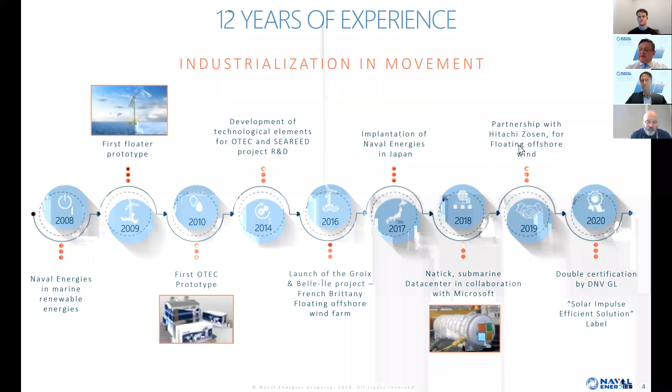But let's concentrate on floating wind, for which we intend to provide anchored and deployed floating platforms at sea. On this huge market, three main geographic areas are identified for the near future, meaning the coming decade, with existing small projects but also promising first commercial-scale projects. Those areas are Western Europe, Eastern Asia, and the US.

But on a longer term, the market is huge. From the Carbon Trust forecast, 70 gigawatts of floating wind is to become reality by 2040. That means, depending on the size of the turbine, between 4,000 and 7,000 floating units to be manufactured in 20 years. So we are talking about products that will be manufactured by tens per year by each provider. That is a challenge that Naval Energies, the world player, is already preparing. Christophe has this fantastic responsibility. Christophe, the stage is yours.

Thanks, Laurent. Good morning to all of you. I'm Christophe Dorignac, Industrial Manager for Naval Energies. The demonstration industrial process definition is quite straightforward. Moving to the mass production phase is an exciting and challenging topic, another story. And today I'm going to present the methodology and orientations that Naval Energies has developed to address this topic.

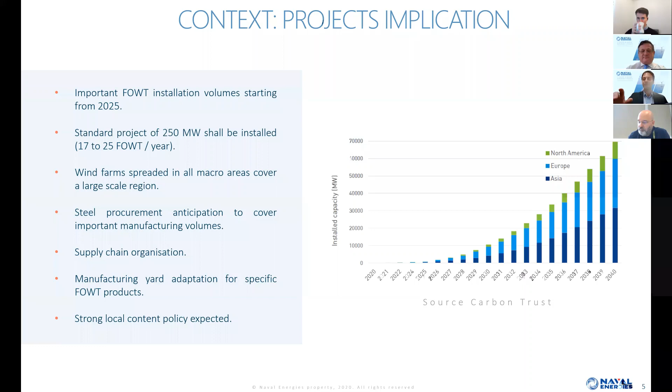So first of all, let's have a global picture of how we deal with that. The first step, of course, is to understand the main drivers of this mass production process. So we have input data from the market: volumes, the projects, wind farm location, global floating volume per macro area, anticipated cost objective, and of course, local content requirements.

In terms of industrial capacity, which is another big driver, we need to understand the in-place and future activities and capacities for assembly, manufacturing, installation, and all the different parts of the group. And finally, offshore activities: understanding weather conditions to define the limited operability windows and the seasonal activities.

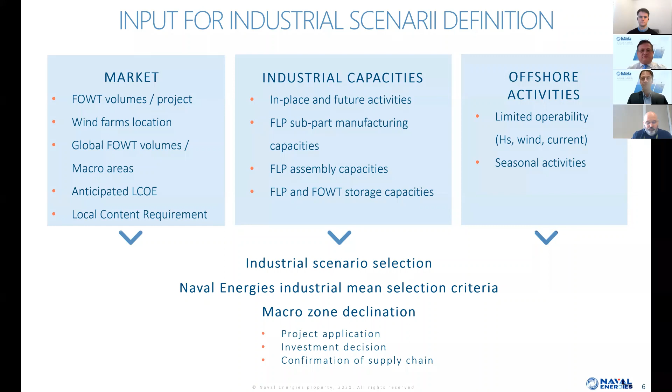Starting from those variables, we have developed typical scenarios that I will present later on, addressing different types of projects. And based on our understanding of the local industrial capacities and the global industrial process, we adapt those typical scenarios precisely to the dedicated project. That leads to a project execution definition and, of course, definition of the investment required.

So, first of all, the key point here is to understand that there are two parts in this mass production process: on one part, manufacturing, which is mainly a yearly activity, and on the other side, installation at sea, which is seasonal. So you have to deal with two different rhythms, which is a big challenge of this activity.

So again, manufacturing, where obviously you can't stop your activity for part of the year, and you have to be efficient and continuous. And the other side, installation at sea, which is seasonal, and if I take, for example, Scotland or Brittany, you have about 3, 4, 5 months to operate. So it means that you have to combine those two rhythms, and the key point here will be storage at sea and storage onshore.

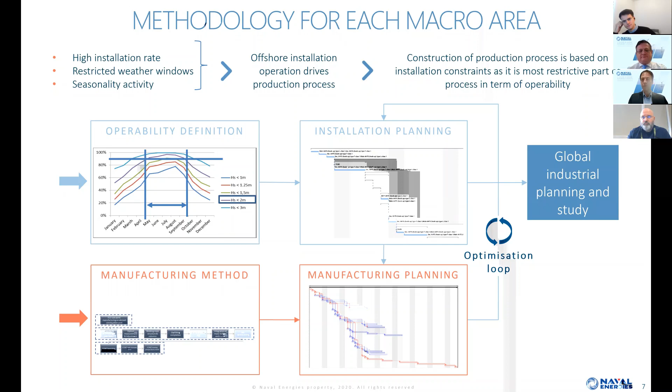So the methodologies that we have developed to try to optimize and find the good equilibrium is to run in parallel, first, an operability analysis that gives us the exact window that we can aim for installation. In parallel, we ran a manufacturing methodology analysis based on the selection of our best typical scenario, adapt it to the site, and then do optimization loops to be able to define the best equilibrium between efficiency, cost, and schedule. And it leads then to an optimized execution plan.

Let's go now, before talking about scenarios, about the global process, which is quite the same for the different scenarios, which is how we go from steel procurement to installation. So, considering the size of those floating units and considering mass production, those floating platforms are built first into subparts that will be manufactured in different yards, specialized on the type of blocks we are considering. If you look for columns or for pontoons or for central nodes, this is addressed by different specialists. And to get efficiency in your global process, you need to address it through different specialists and not generalist companies. And obviously, in the macro area concerned by the farm.

We then go to an assembly phase of the floating platform. I will talk later on about the locations of all those activities. Then there is, of course, the integration of the turbine, which is done by the WTG contractor. And then we go for installation of the different units.

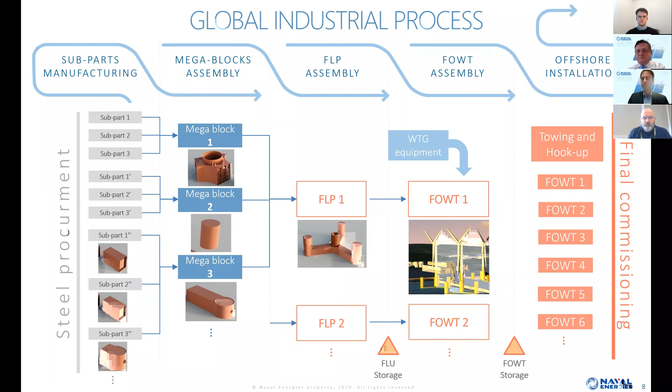So here are the three typical scenarios Naval Energies has defined, which will then be combined and customized during the declination phase to stick to the capacity in terms of harbor or industrial. The first scenario is a temporary production one, which is used for small farms or isolated sites, meaning from 2 to 10 units in terms of demonstration, or where you don't have any industrial capacity, you are isolated. I think about island projects, for example, like La Réunion.

Scenarios 2 and 3 are quite the same in terms of spirit. The difference is in the continuity and the visibility we have in the future to continue the production. So the base of those two scenarios is fabrication of mega blocks in different yards, locally or out of the country, according to the capacity of the site we are considering. Then the development of an assembly hub to assemble all those blocks, which are transported by HTV. This assembly site has to be as close as possible to the site. And there are two options. Either we consider the WTG integration integrated in this assembly hub, or if it's not possible because the surface is not enough, we will consider two different sites. And then, after assembly, we launch it in the water and then go for the installation phase.

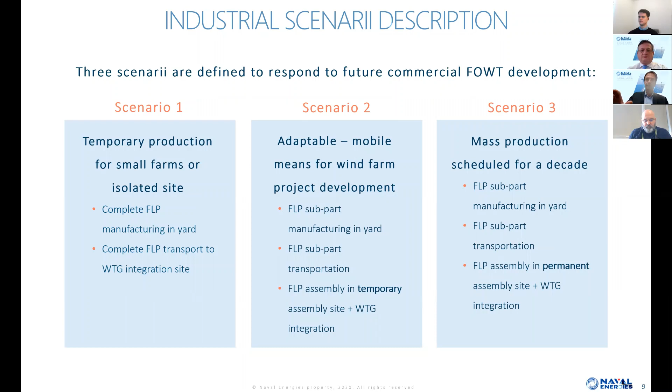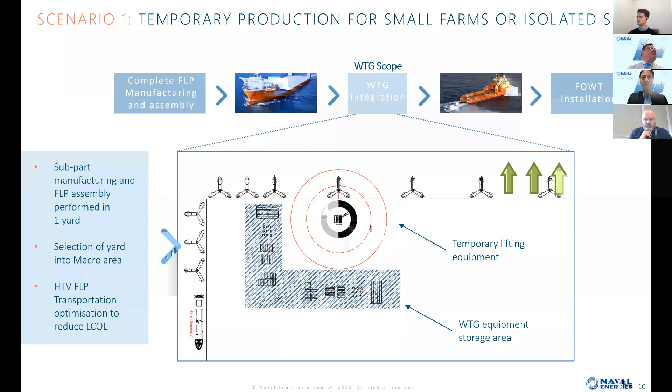So let's go first to scenario 1, which is quite simple to understand. That's the one which is mainly used in demonstration phases. So again, complete floating platform manufactured and assembled in one yard, transport by HTV, WTG integration and installation. So this is a typical schematic of what could be an integration site. It's not representing a real project, and the number of storage spots is important there, but it's just to show a principle. For those storage capacities, we defined some tools to be able to define accurately what kind of storage we need.

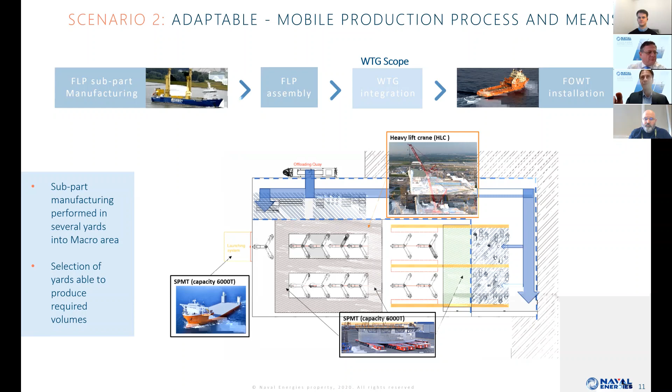In terms of scenario 3, where you have visibility, then you could go to permanent equipment that will lead to the maximum efficiency expected, meaning that you can install lines of transfer, ring cranes, gantry cranes, launching systems, which could be even permanent. So meaning that you could really go to the factory spirit to reach industrial efficiency.

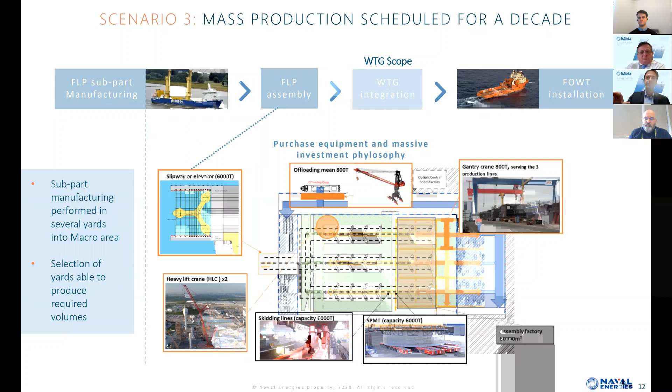In terms of anchorage, it's a more standard subject. So the requirement is more or less a surface from 5 to 12 hectares to store the different components of the anchorage system, depending on the volume of the farms, and to get enough quay to be able to load that equipment, and of course equipped with lifting capacity, much lighter than for the assembly phase. So I think a little easier to address, straightforward.

If I come back to the assembly phase, I will say that the requirement is between 40 to 60 hectares according to the volume considered, and in the first analysis we have made, we can say that, for example, for Korea, France, Scotland, and the US, the surfaces are there. We find them now. It's about understanding the potential common investment and definition with local authorities and harbors to prepare them.

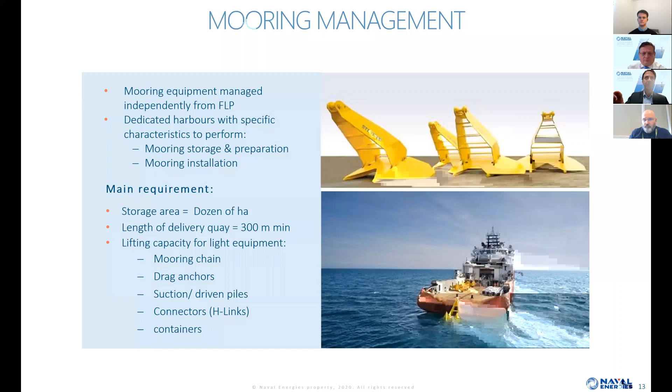That makes a link with local content, which is here a key point, of course, for the acceptability of projects and the wish of all the actors of the floating wind industry. Of course, we need to think about local content. First, understand what the requirements are, and closely understand with stakeholders, with local authorities, what capacities exist, what could be the evolution in investment, to define the best equilibrium between local content, cost efficiency, and local development.

So I would say there are two main scenarios there, maybe three. The first one is to consider a full scope in the country. If the country or the location is highly industrialized and has the right capacity, we could consider a 100% local scenario. But in real life, we could reach a partial saturation of the different capacities. And in this case, we will use a combined one, again, in close discussion with local authorities and industrials, to find the best equilibrium to, at the same time, maximize local content and be able to follow the target in terms of cost and schedule of the projects.

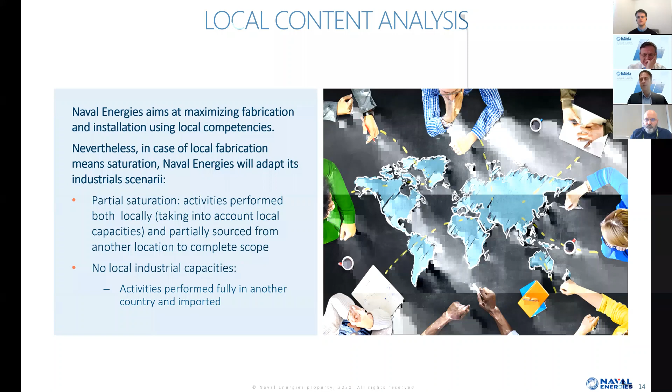So if we go for a quick analysis of the different items, I would say there are 2 or 3 different types. As concerns steel procurement, we don't believe, as concerns the volume and the specificity of the activities, that it could be considered as local content.

For the central and external columns fabrication, so the mega blocks, we do believe that will be a combination of both. Surely at the beginning, we will start with a small amount of local content, and with, let's say, the ramp up of industrial capacity on the site, we could increase it and go, we think, to 60% of fabrication for mega blocks.

Same for pontoons. As concerns the final assembly, and I deal here with mass production, so I will exclude scenario 1. With the organization we proposed, final assembly will be 100% local content, which is a big part of the job and the key point. And more than the volume, it will require high skill and a real knowledge that could be even used by companies then to go for other activities.

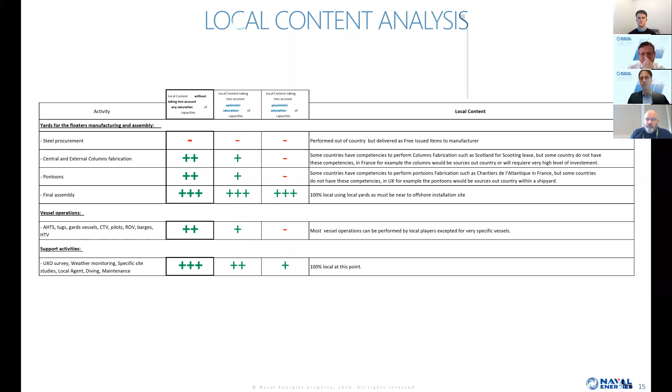As concerns vessel operation and support activities, that's the same as for production. We don't believe that we will find 100% of all the different means at the beginning of the project and the beginning of the mass production story, but local industry will ramp up in parallel to the process, so we could go to 50 to 100% local content on this topic.

And finally, on, let's say, the different infrastructure, industrial means, specific means, mooring systems and equipment. We do believe, obviously, ground rental area will be at 100%. And then on the other ones, it will be the same as for installation means. We will go for a small amount at the beginning, and with the volume and the different requirements of the project, the areas will equip themselves, and we could ramp from 50 to, let's say, 70, 80%.

Why am I not saying 100%? I'm not sure that, for example, for big crawler cranes or ring cranes, we will find a local supplier all the time, which is more a world topic.

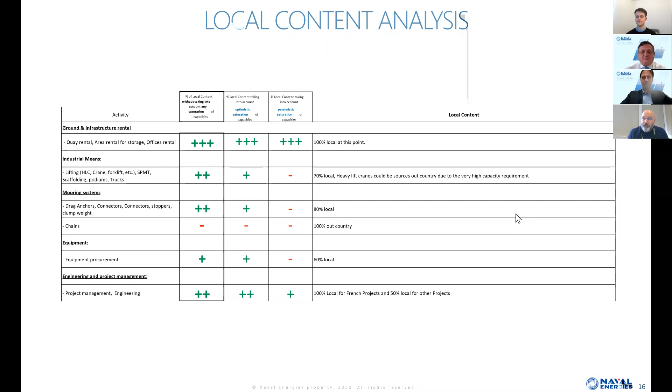So in general, I have nothing else to say to this presentation. I really agree with all the points. From a developer point of view, we think that we are at a very interesting point where most of the technical challenges have already been reviewed. So this phase in which we as a final user challenge certain designs is almost over, with very little exception. It could be TLP technology, which is not sufficiently proven so far.

So for me, or for Iberdrola as a final client, if we are involved in pre-commercial or demonstration projects, it is not for the sake of testing the technology that is in the hands of the technology developer. For us, the most important thing is to manage those demonstration projects in which we can control the potential risk and impact, but to manage them in the same way that we will want to manage the next-step commercial projects, in order to first analyze the whole supply chain and localize the weak points and bottlenecks in that supply chain, and be ready to tackle those bottlenecks. And second, to optimize them all and understand the whole manufacturing phase and manufacturing procedures in order to reduce the cost.

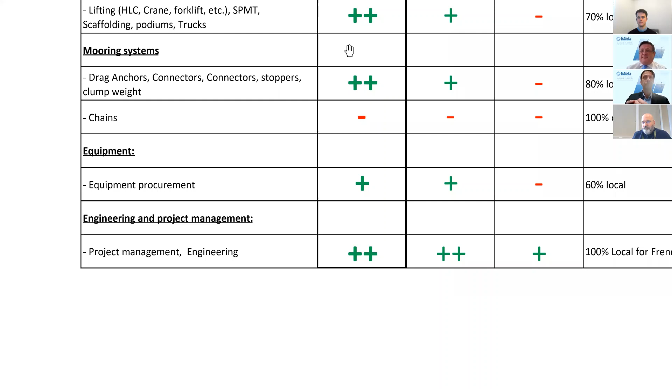I've seen one question: when will we see the first commercial farm deployed? And we believe, maybe Ignacio will contradict me, that the first commercial farms will be deployed at the end of the decade, 2026, 27 or 28. So it may seem a long way off, but we have so much work to do before that, we need to start now. And we are now working with the stakeholders.

We're working with the harbors. We're working with the different locations, as Christophe said, to understand their request, to understand their capacity, and to build that and to do that together.

We have also to work with the local people to set up the workforce, because to assemble at the rate of 10, 20 per year these sort of huge products, you need qualified people. You need people that are able to do it at the right time with the right quality. And that is not always available everywhere. So we are also working with the local authorities on these points. So it's a lot to consider then.

So of course, Ignacio, any additional comments, and also to add that question back, Ignacio, to consider too: how are you going to be able to source a high quality local workforce, considering particularly now it is a newer technology?